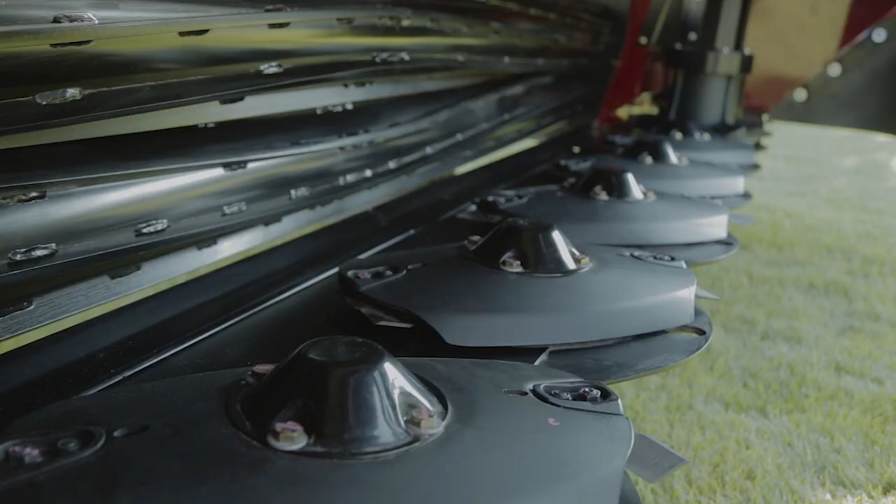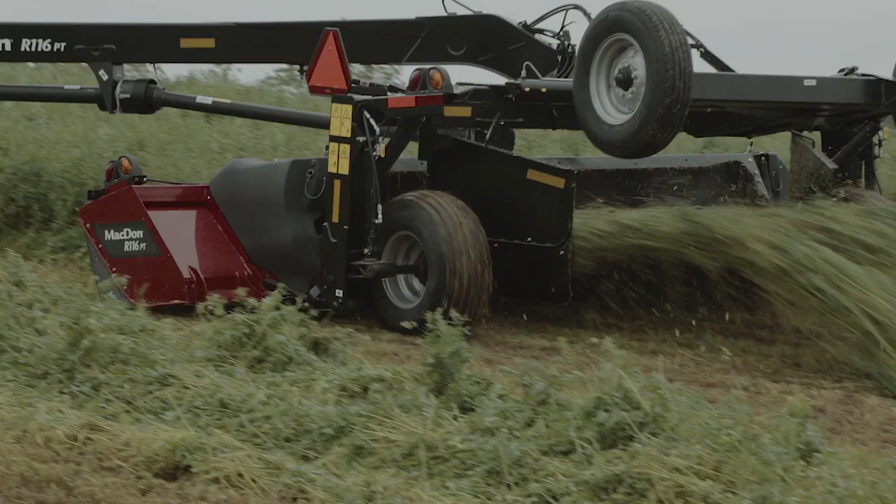One of the benefits of the new MacDon R1 Series Disc Mower is that it features a unique cutter bar design which allows the disc rotation pattern to be fully customized to suit both normal and abnormal crop cutting conditions. MacDon disc mowers are factory configured with the best disc rotation pattern for optimal performance in the widest range of cutting conditions.

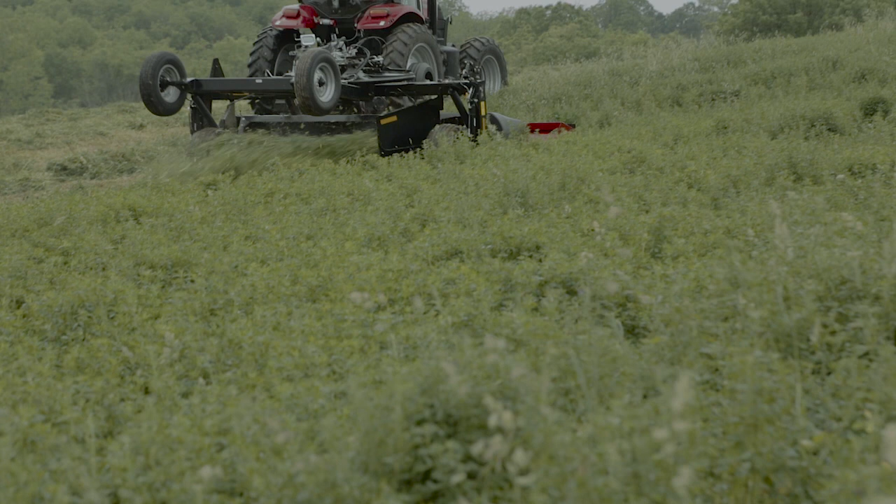However, if your crop conditions are either extremely light or extremely heavy, then it might be possible to further optimize cutter bar performance by reconfiguring the disc rotation pattern.

Alterations to the disc rotation pattern should not be undertaken unless there is a significant amount of either extremely light or extremely heavy crop. There are 4 possible disc rotation patterns on the R1 Series Disc Mower, with the most commonly used patterns being either the 1 or 3 crop stream configurations.

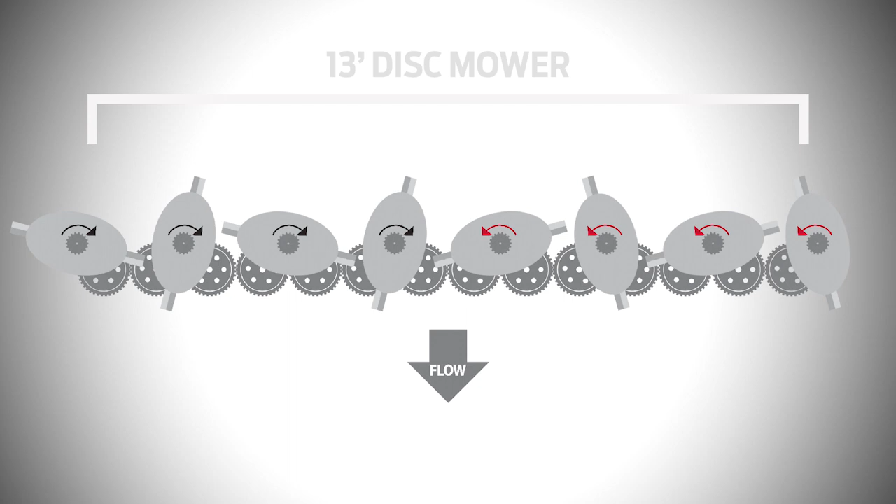In pattern 1, all of the discs rotate inward towards the center of the unit. In this configuration, there is only 1 crop stream exiting the cutter bar, which offers optimum performance in light crop conditions.

In pattern 2, the outer discs rotate inward, while the center 2 discs counter-rotate. This is a 2 crop stream configuration that might offer slightly improved performance versus configuration 1.

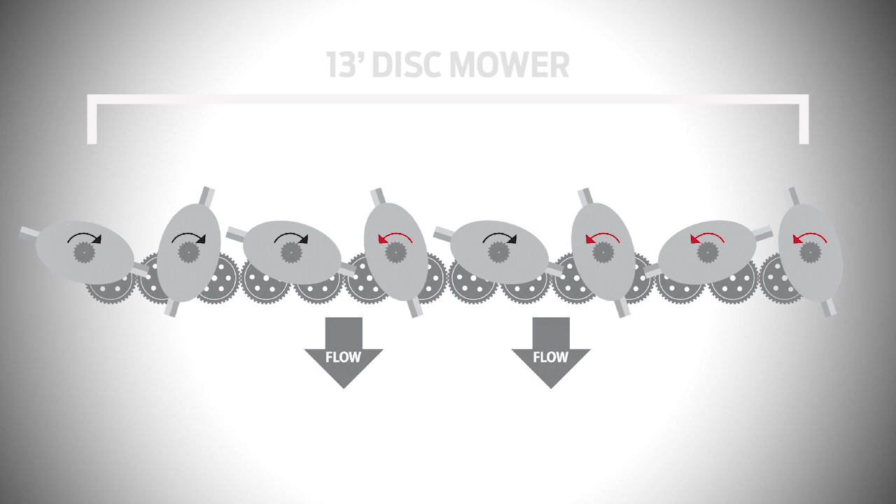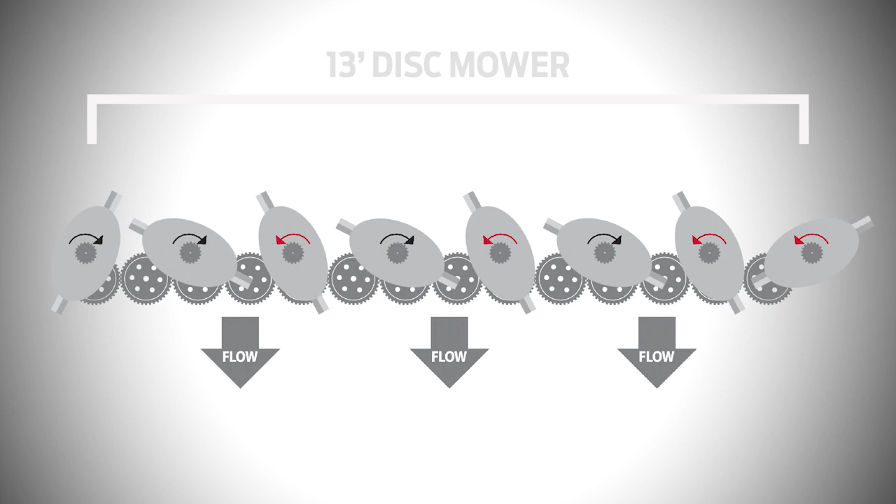In pattern 3, which is the factory configuration, the outer 2 discs on a 13-foot, or the outer 3 discs on a 16-foot, rotate inward, while the remaining discs all counter-rotate. This is a 3 crop stream configuration that typically works well in heavy cutting conditions.

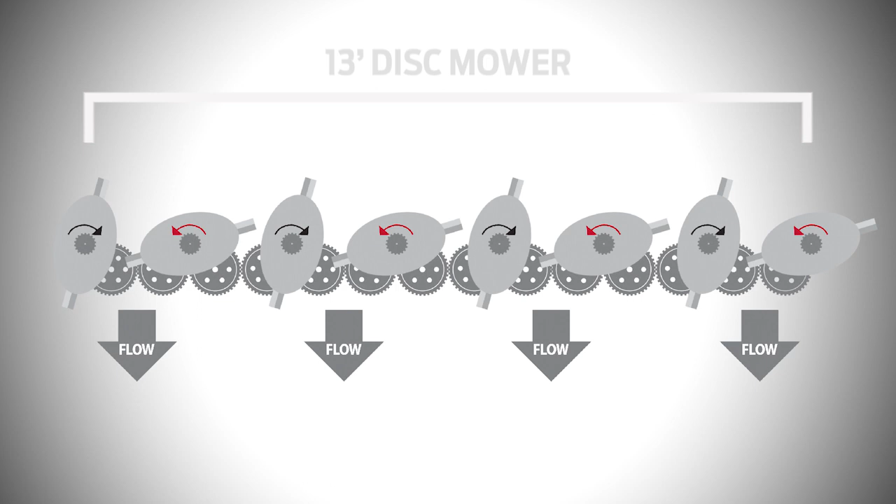In pattern 4, all of the discs on a 13-foot counter-rotate, while on the 16-foot, the outer 2 discs rotate inward and the remaining discs counter-rotate. This 4 crop stream is a consideration if cutting the heaviest of crops.

There are an even number of clockwise and counterclockwise oriented cutting assemblies used on the cutter bar. The 13-foot has 4 of each, while the 16-foot has 5 of each assembly.

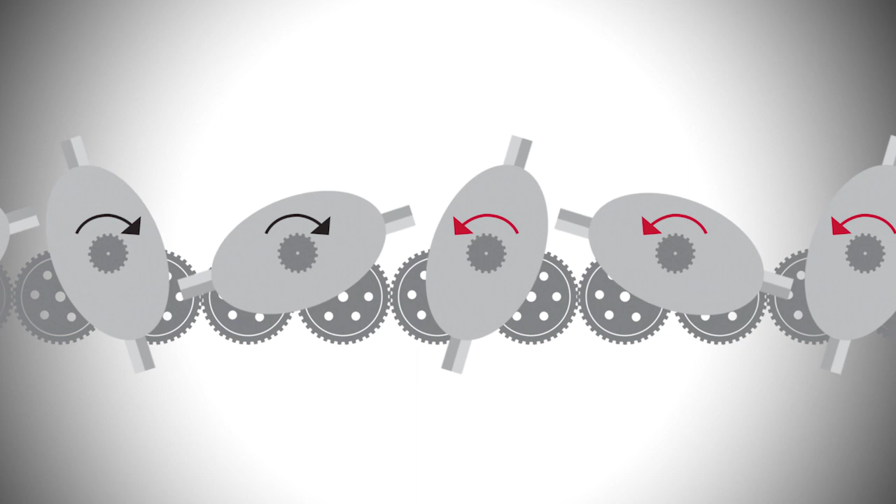On the bottom of the hub, you can see how the gear is offset to the mounting ring. This allows the gear to contact the opposite idler gear for a different rotation pattern. It is important to ensure that each hub is always set to rotate in the same direction regardless of where it is installed on the cutter bed.

When we look at the 2 assemblies, the one on the right-hand side is a clockwise rotation assembly and is identified by being smooth on the top of the shaft and the nut. On the left-hand hub assembly, notice the machined ring on the top of the shaft and the nut. Based upon this, we know that this is a counterclockwise rotating assembly.

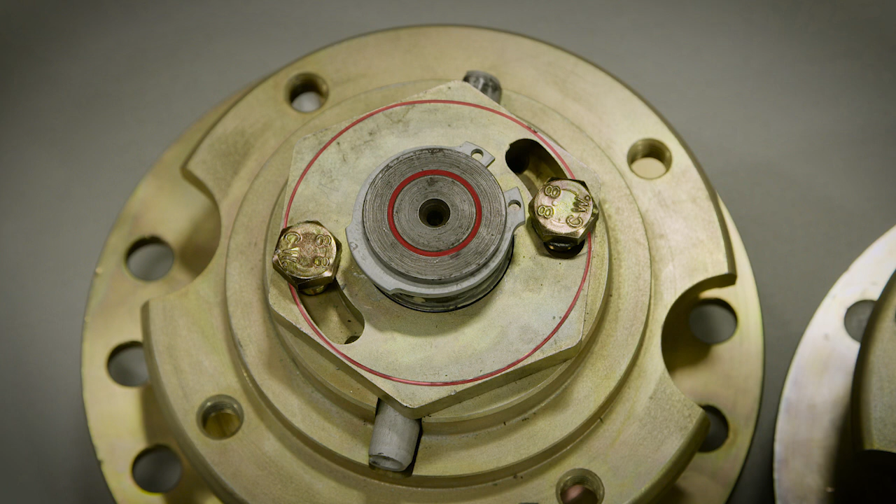It is important to keep the nut and the hub both of the same orientation because the nut will rotate up on the threads when the shear pin is sheared. This allows the cutting blades to clear each other in the event of shear pin breakage.

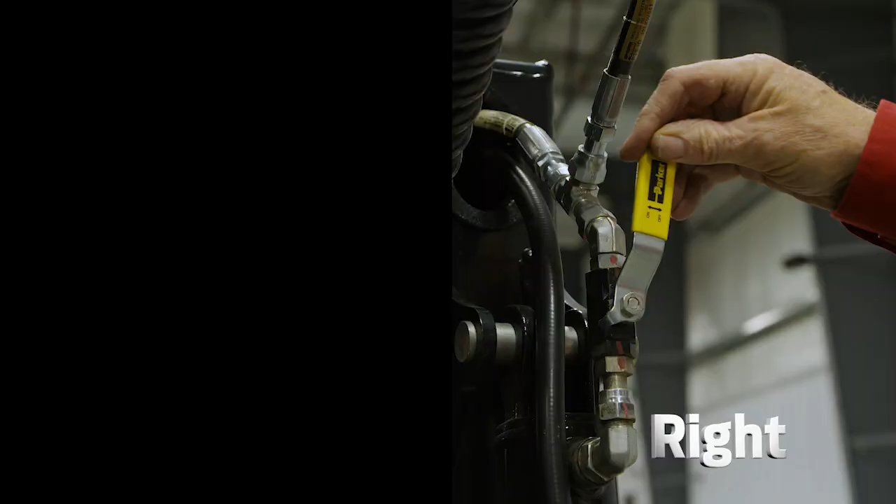Only one person should work on the cutter bed at a time to avoid unexpected movement of the rotating parts. The disc mower should have the cutter bar raised off the ground and the header angle tilted to the flattest guard angle. Engage both safety stop valves to avoid injury.

Shut off the engine. It is advised that the cutter bar be as clean as possible to avoid any contamination of the cutter bar oil.

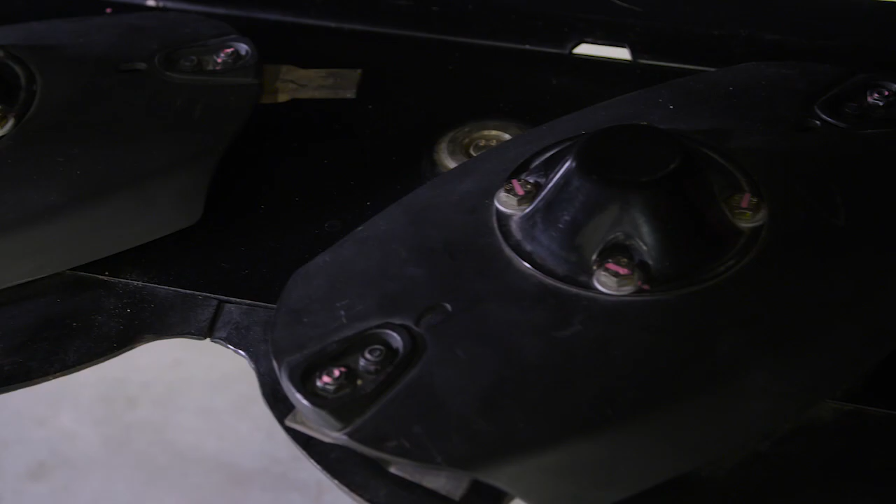Factory configured R1 Series mowers have 3 crop streams. To avoid confusion, it might be helpful to label the crop streams. Label the rotation pattern on each disc.

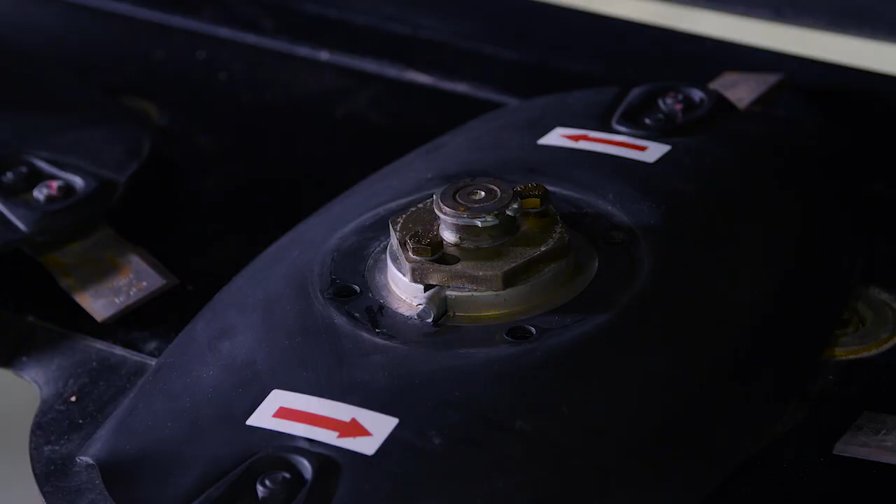Remove the disc. If installed, the flange, or spacer ring, should be removed. Label the rotation pattern of the inner drive hub.

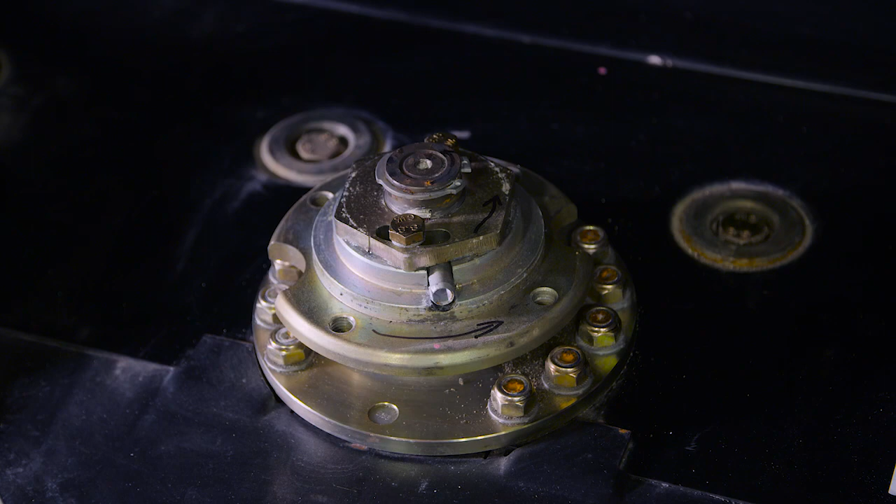You will need to move both the drive hub and the disc to the new position on the cutter bed. Caution should be used at all times when removing the drive hub. Align the 2 cutouts in the hub with the center line of the cutter bed before removing the hub.

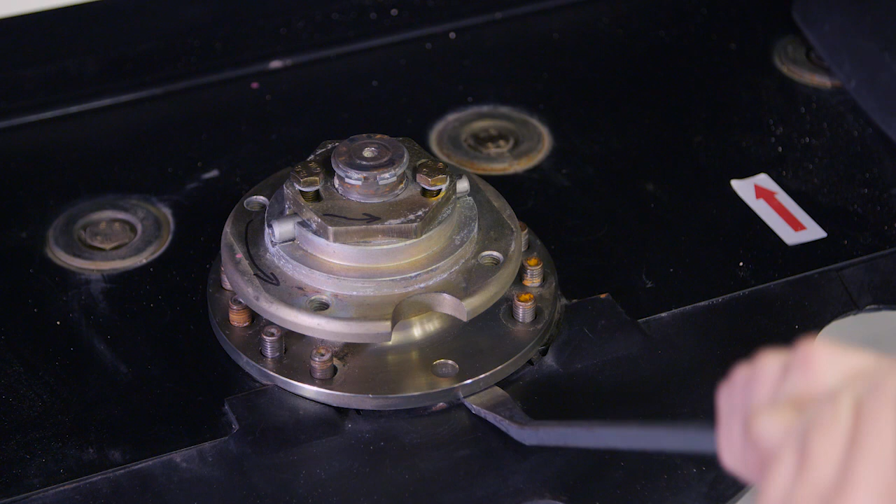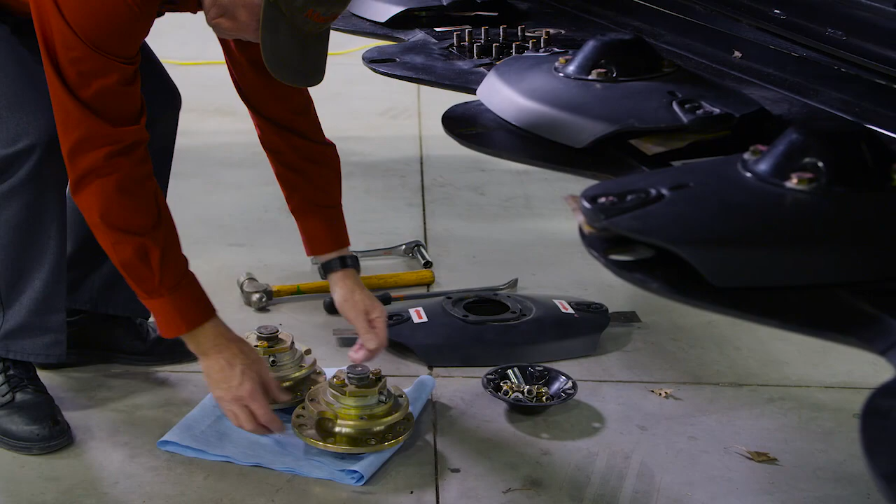You might require a small pry bar to break the seal, allowing the drive hub to be removed from the cutter bed. Ensure that the O-ring remains with the drive hub and that it doesn't remain on the cutter bed. Carefully switch the drive hub to its new location, using caution not to contaminate the cutter bed oil.

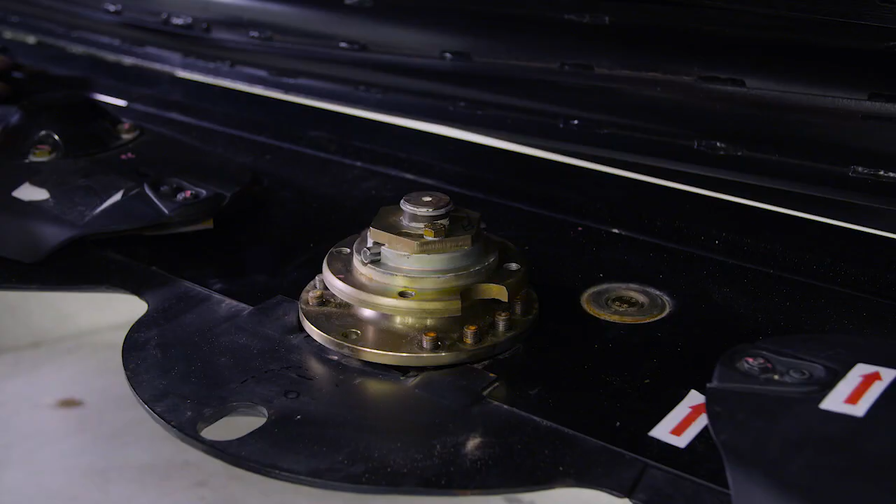This clockwise rotating hub will continue to be clockwise rotating in its new location. It is a good idea to do a temporary install of the disc to check for proper balance and alignment before installing all the bolts on the housing.

Now we rotate the disc to verify the correct timing. Timing is correct when the disc is 90 degrees to both adjacent discs. If a disc is out of time, half a tooth, then we would correct by lifting the hub and rotating the spindle 180 degrees to pick up on a different tooth.

This will allow us a half tooth adjustment. Be careful not to rotate the base and only rotate the spindle 180 degrees.

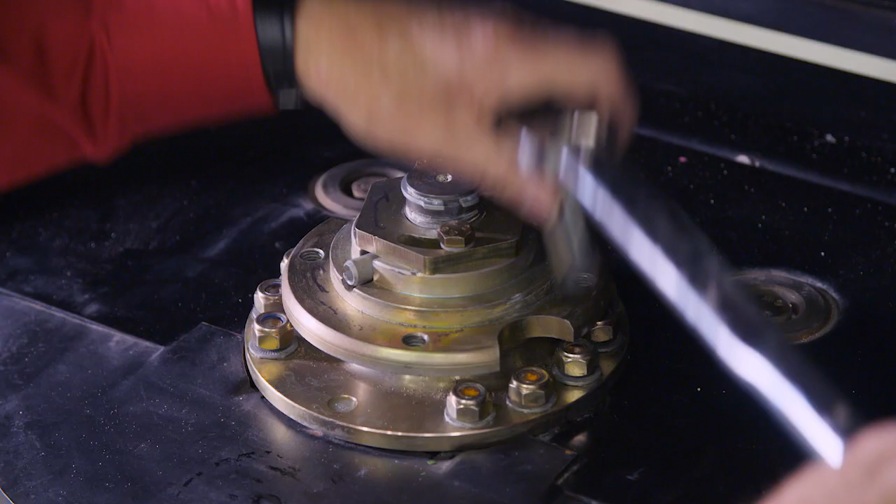Ensure that the disc is at 90 degrees to the adjacent disc. Reinstall all hardware onto the drive hub in its new location. Tighten all hardware and torque the drive spindle hub bolts to 37 foot-pounds or 50 newton-meters. Install the disc and torque the disc bolts to 63 foot-pounds or 85 newton-meters.

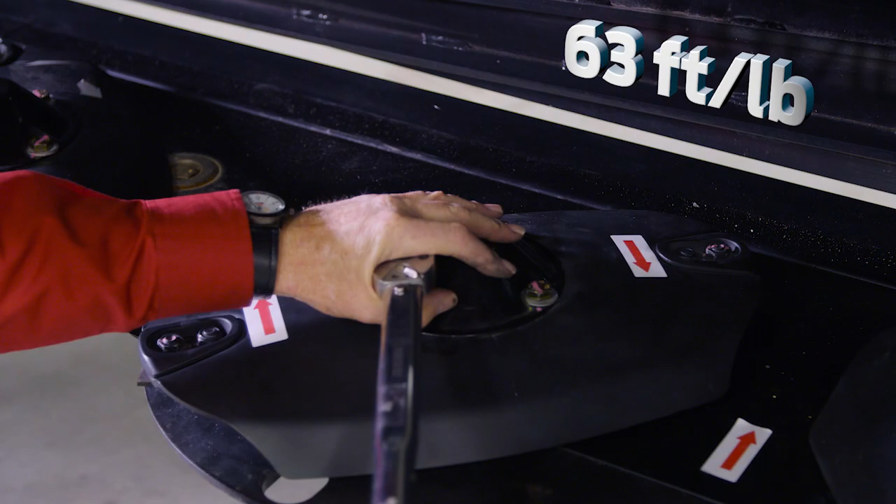You can now check your disc rotation pattern, and each crop stream can be marked to ensure that you have achieved your desired rotation pattern.

MacDon R1 Series Disc Mowers are factory configured to a 3 crop stream configuration, which is the best overall disc rotating pattern in the widest variety of crop conditions.

The ability to customize the disc rotating pattern allows MacDon customers greater flexibility for extreme drought conditions or if operating in heavily irrigated, high-volume crops.